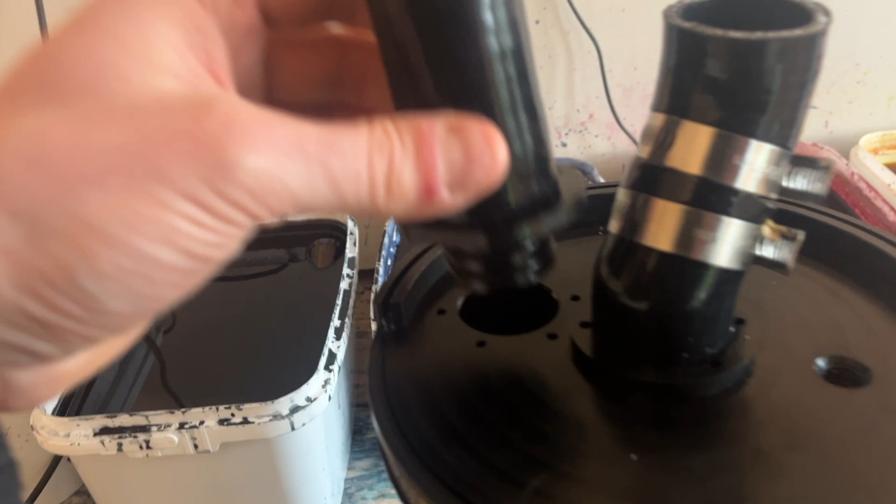Yeah, so just got this offset pipe here, in and out, inhale, exhale. But because I can't model this, I had to just kind of draw something up.

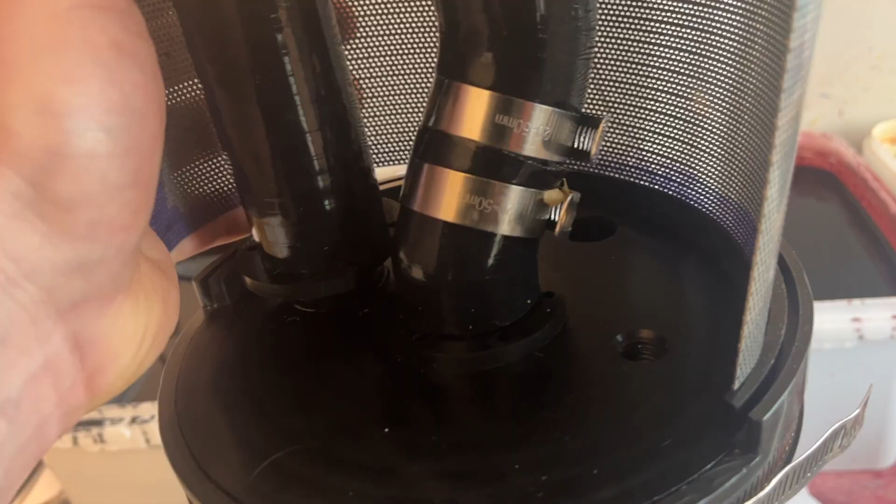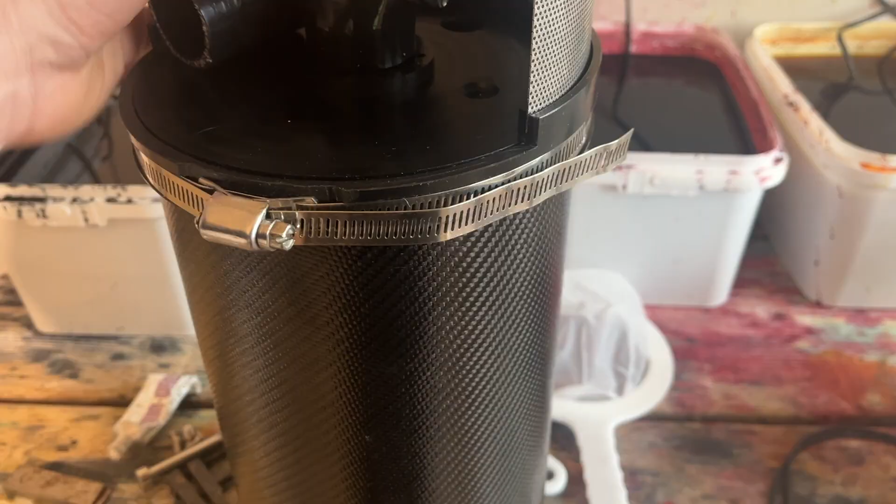Broadly it looks like that. Yeah, I think I'm showing a good job of how life is in my design studio.

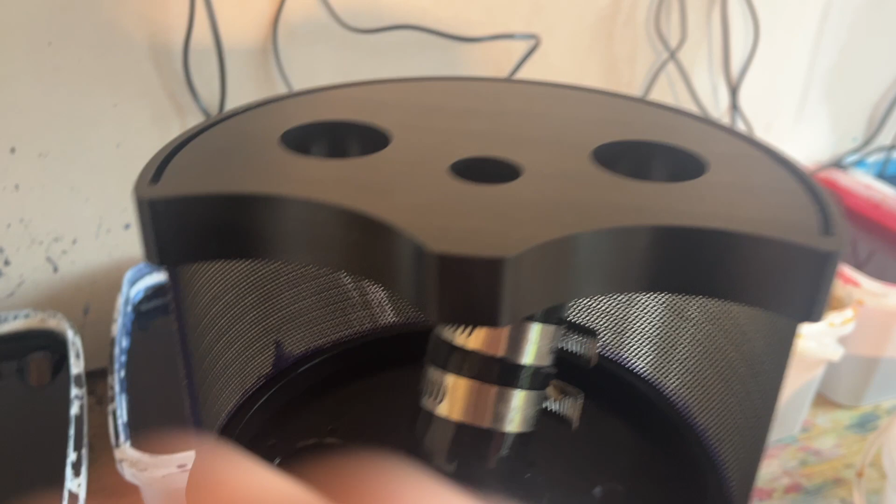This is how it was designed before, and I was like, oh, the pipes will just fit up to there. But then they didn't, the pipes are nowhere near. So I've just got to measure the offset of that today.

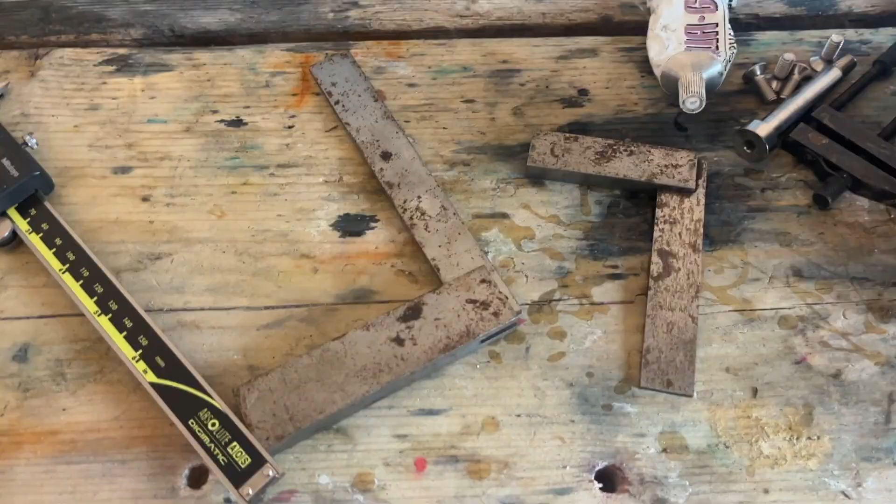To do that, we'll be using a couple of squares, just measuring the distance that it drops down. I'll take these two clamps off, put the other square there, measure the distance between it, go into Fusion, find out what the measurement is, and then I can machine something, and we're at the next stage.

Okay, so Command Z. I need to draw a line. So what did I say? It was 73.5.

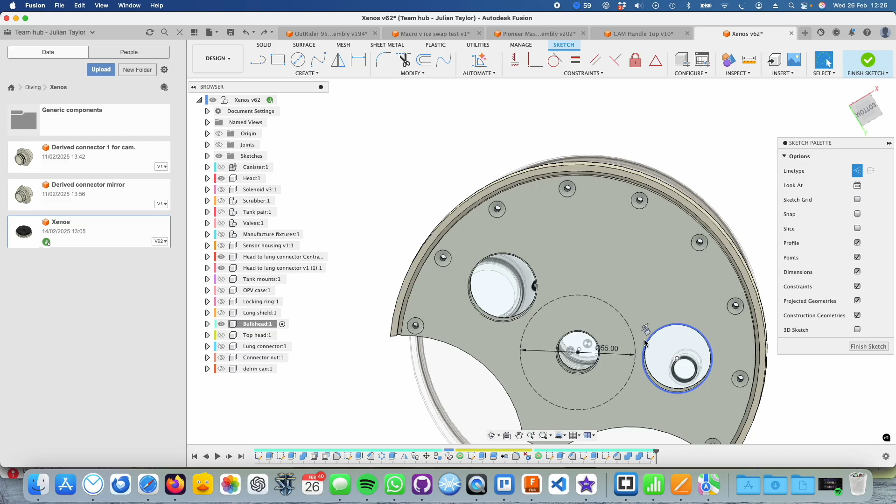So we need to draw a line between there and there. 34.2, the angle of it. It needs to be 73.5, which is the length, minus the radius of that circle, which is 27.5.

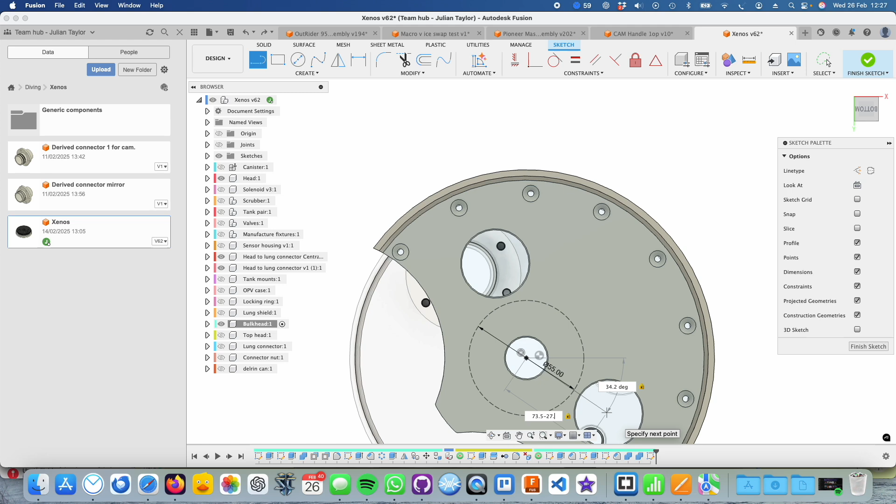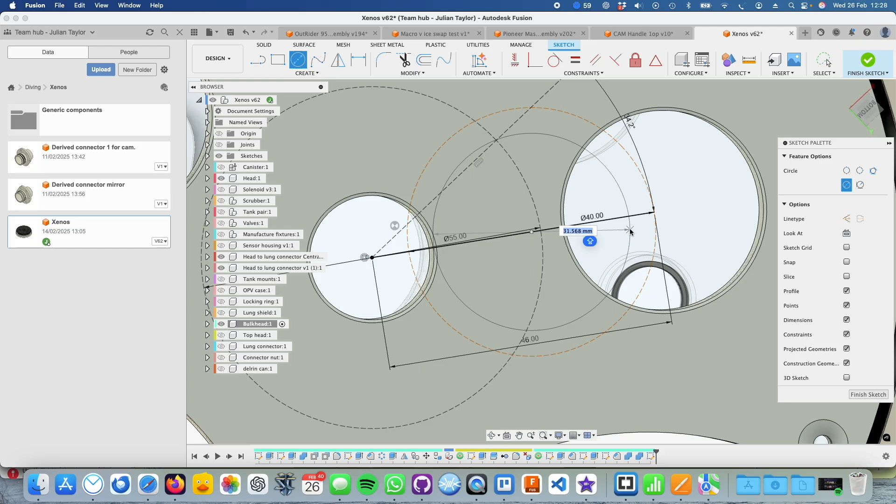Minus 27.5, I need to draw a circle, 2-point circle, one there, and it needs to be 40. Then we'll draw another circle, 32, and that's where the circle is there. And then we'll put that.

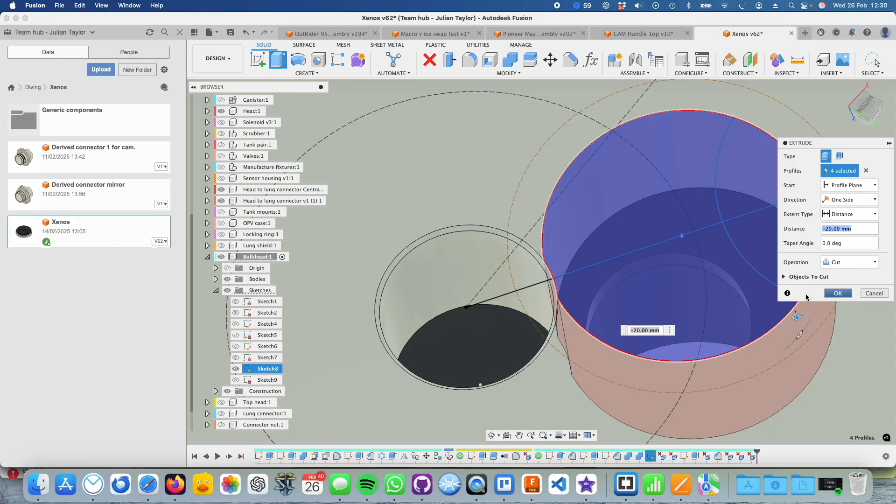And there we go, let's go machine it. That looks alright. I'm not too bothered about the top bit, that's going to get faced off in a minute.

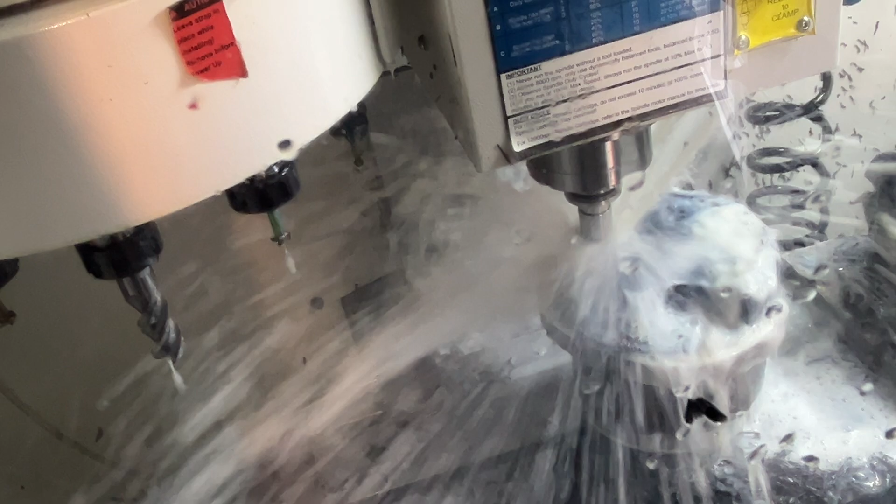So that's op 1 done. Let's flip her over, probe the surface of the jaws, and get op 2 on the go. So I've just probed off the surface there, then put the part in, face it, and then I'm going to reference it once it's to thickness and I've got features to do.

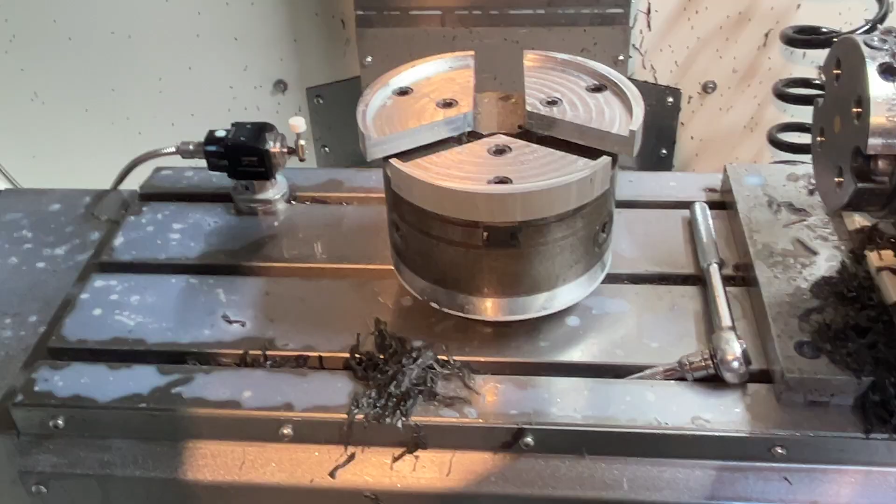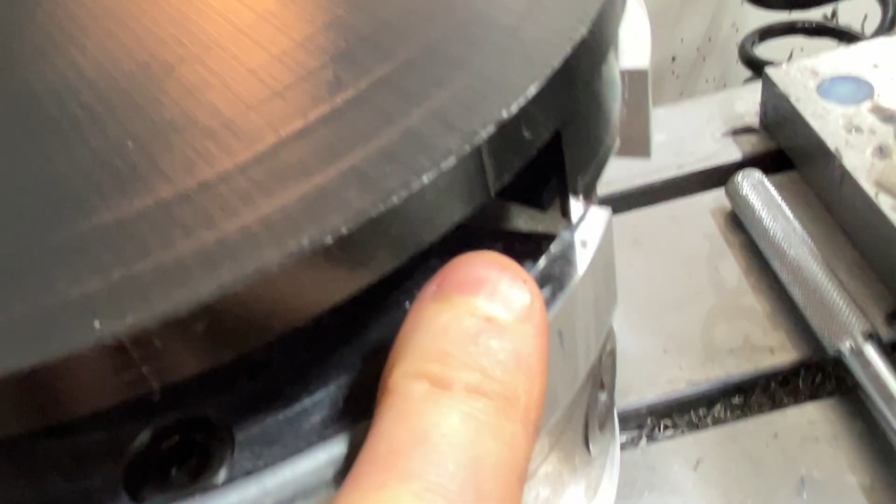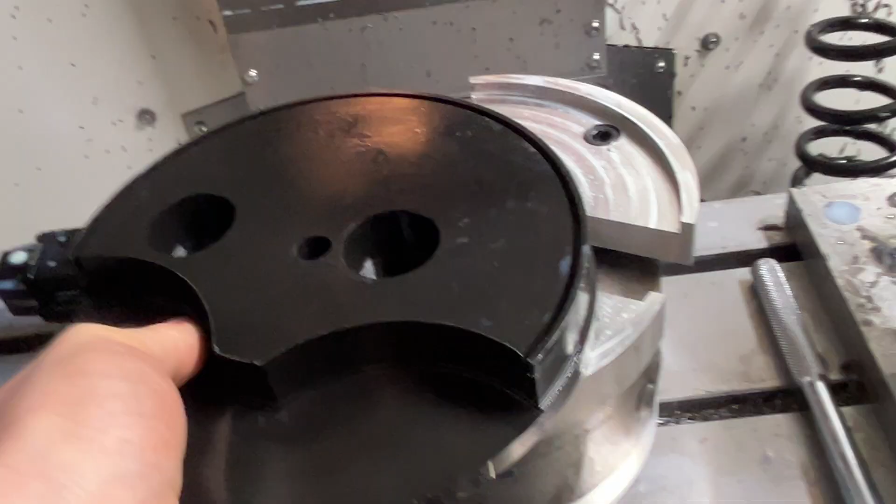Disaster - well, not quite disaster, but since I've cut those slots in there, these jaws are too shallow and they would just squash the plastic in and wouldn't grip it hard enough for me to do op 2. So this either means cutting a new set of jaws or figuring out a new way to do this.

Either way, it's not very good, let's put it that way. So let me think of something to do and then I'll come back.

So I've got it somehow clamped in something, I've probed it very rough and dirty in the middle. It's not my finest bit of work holding by a long stretch, but I'm hoping it's just gonna get us to the finish line with it. So I'll turn the speeds and feeds right down.

Otherwise it's probably just going to pull out. But yeah, let's see how she looks. Woo, see, that's flying through.

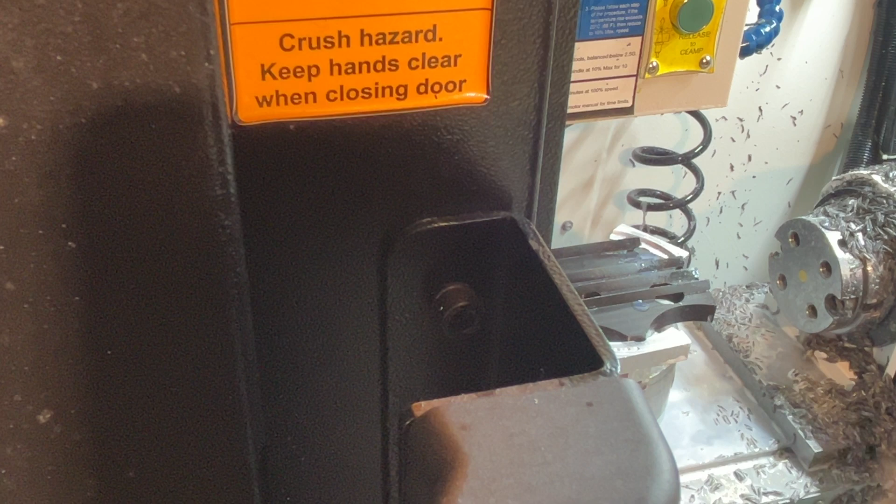Pretty gash, but at least it gives me - what I'll do, I'll finish it off properly. I'll probe in there, get the proper centre, and square it up a little bit. I'll square it up by eye, then probe in, get the proper centre, do a finishing pass that's proper instead of just that one, and then we'll be done.

So, just going to clean up that top. I need to probe that central hole. So I need to jog this down so it doesn't crash.

Let's see what she's doing. Yeah, it looks good. So once that's done, she should come in, clean up the top a little bit, and then do the grooves on this side.

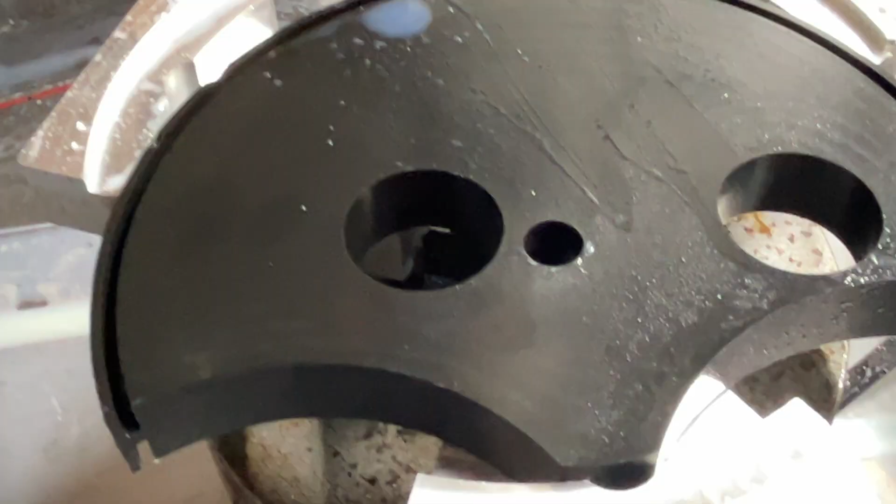So I just finished that clean-up pass and that's super smooth. What a finish. I do love my Syil, as much as I hate it, I do love it. I wish it was better, and it could be better so easily - they could easily make it like a world killer. But I do love it, even though I hate it. I love it more than I hate it, I mean.

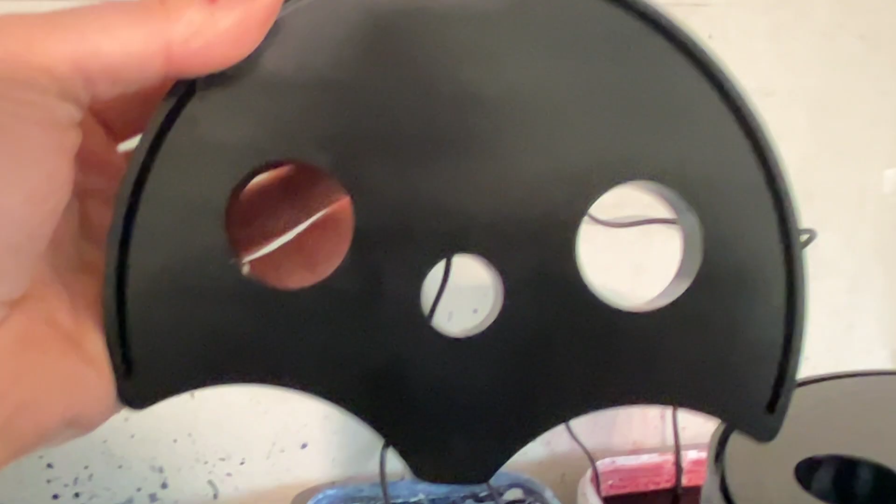So, back in the shed. That's what it looked like - little Thomas the Tank Engine smiley face. That's what it looks like now. And as you can see, the tubes underneath are a lot better aligned.

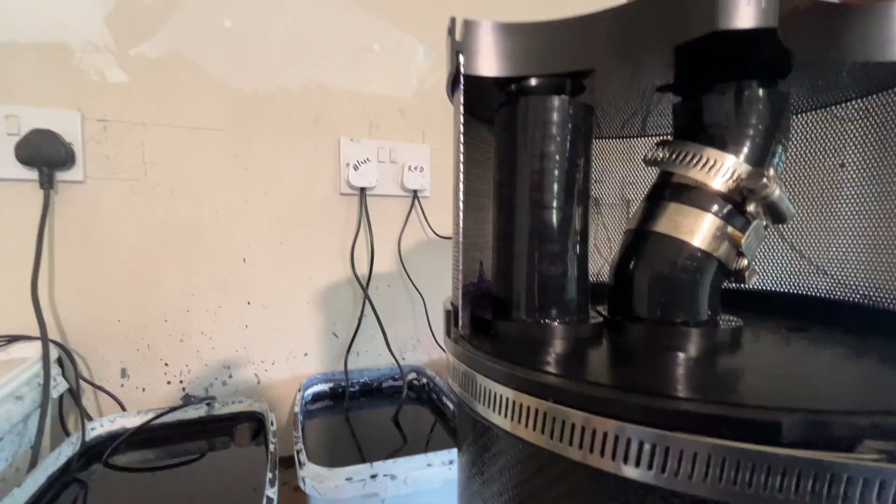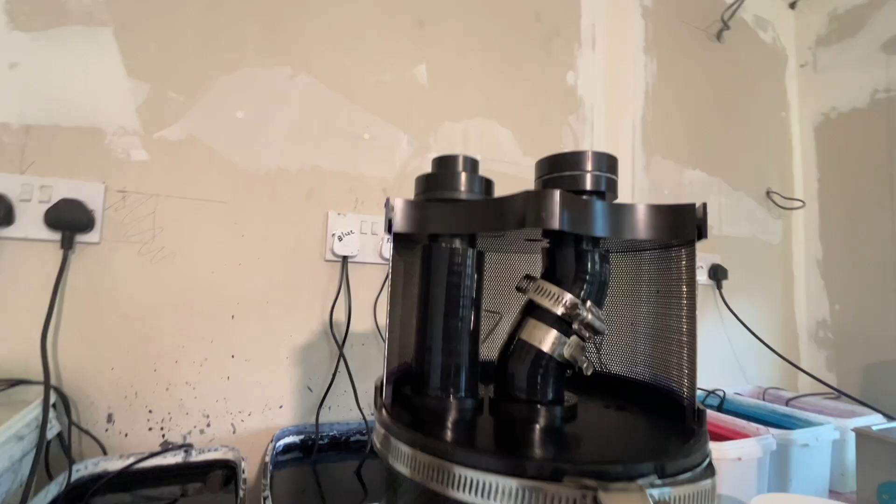Just a minute, if we pop that into there, that goes nicely into that one, and that one goes nicely into that one. So I think - why doesn't that one go into that one? That one can go into that one. But yeah, perfect.